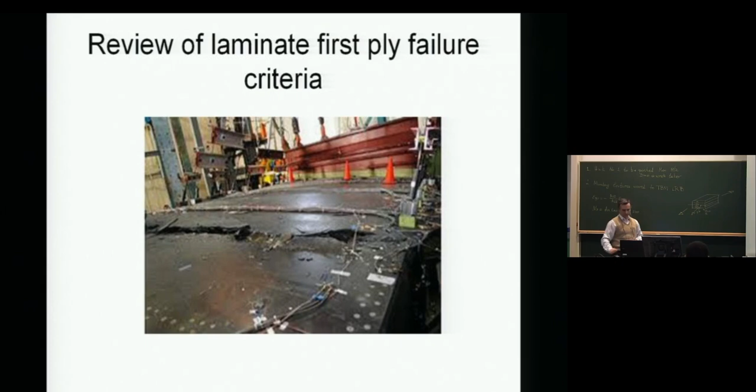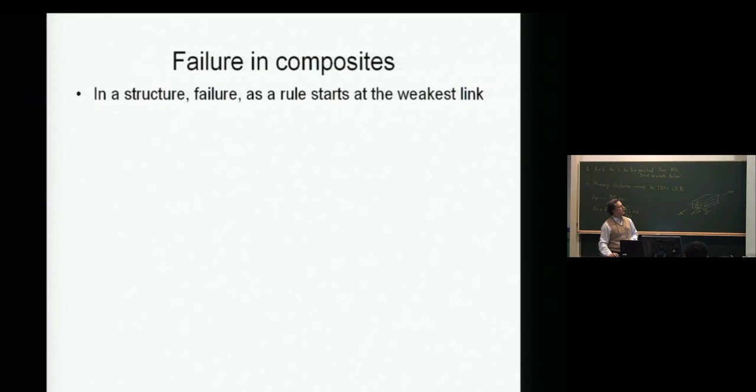Failure, as a rule, starts at the weakest link. It sort of makes sense, but if you compare it with what happens with stiffness, then it's actually quite insightful to think about it. If you're trying to calculate stiffness where you use a multiple set of materials, you will calculate the corresponding stiffness of each material and end up with the total stiffness as a weighted average of all the stiffnesses. For example, we said that for the A matrix,

Aij is summation of Qij times the Zk minus Zk minus 1 term, which means for a certain stiffness in a certain direction, let's say the 1, 1 direction, you take the stiffness of each ply in that direction and multiply by this; this now becomes a weighting factor.

It so happens if all the plies have the same thickness, this term would be exactly the same, but not all the plies will have the same thickness in a general design if you use different materials. So there's a weighting factor, and this then makes it some kind of a weighted expression. So in stiffness, everything contributes and somehow will be put together. In strength, the weakest link is what starts everything, and it has nothing to do with how strong you are in other locations.

And the weakest link in general, if you think in terms of the constituents, which are the fiber and the matrix, is the matrix itself, unless you are using metal matrices, which are extremely expensive and not commonly used. But let's say we are dealing with composite materials where the matrix is typical resin of today, which would be extremely weak compared to the fiber. So that's what will fail first.

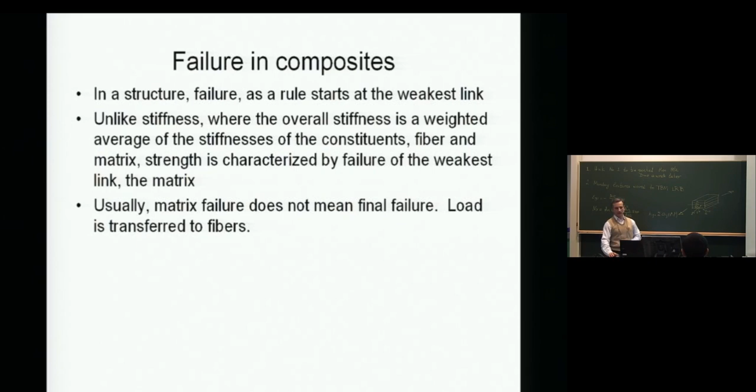And as you can imagine, if it's not a very strange stacking sequence, then that failure does not mean that all the fibers around that failure will fail. So load gets transferred from the matrix that broke to adjacent fibers through matrix that's still intact, or even through the broken matrix, and you can still carry load. And in fact, you can move load away from the plies whose matrix has failed to other plies and then behave as if you had absolutely no knowledge of that local failure.

Going back to the picture we saw before, these are zero plies, so the fibers are running from left to right in the middle, and these are minus 45 plies, and the little dots, essentially those white speckled spots, are just the fibers coming towards us at an angle of 45 degrees. So this is a crack at the top left here into the matrix, which basically occurs in between fibers. Similarly, this is a crack here.

Now, that happens very early. If you imagine a tensile load being applied, it happens very early because the matrix is weak. And even if I break this here, all that means is somehow I take the load that was in this bottom right portion, transfer it through the very stiff fibers here, and bring it back into the structure or the ply behind this crack. And you can do the same thing here, except in cases where you have delaminations, which means you cannot take load from here to here now because they have separated.

So the mechanisms are there, and I'm trying to indicate that there's multiple mechanisms, and what happens first is not necessarily related even to what happens last. Or if it does, it's a fairly complex process going from one failure mode to the next.

When the fibers break, of course, it's much more interesting, and you can see here that we have a whole bunch; the thickness of the laminate is in this direction, up or down, and all the plies have completely failed, and there's also some delaminations. So that's the ultimate goal, predict what's on the right, but we will start with trying to predict what's on the left, and we'll sort of stop there because we will simply raise our hands up and admit complete defeat.

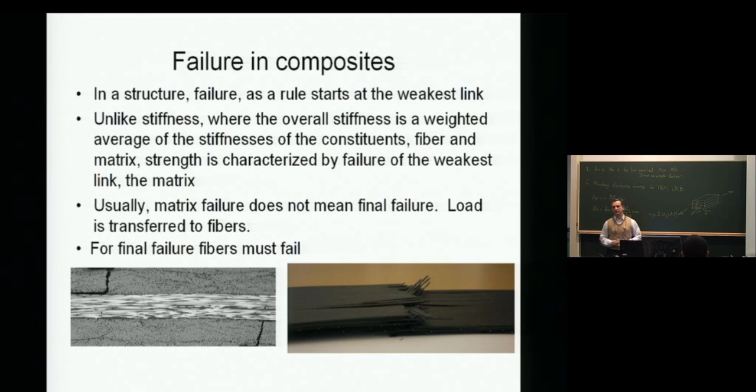So let's get into the failure modes of a ply in 15 minutes. That way we'll maintain the momentum.

This is close enough to 15 minutes, minus half a minute.

One correction: when I was writing the inverse of the A matrix, I had the A22 here and A22 there. This A22 is correct. This one was wrong. It should say A11. That's an oversight, thanks to the gentleman that pointed that out.

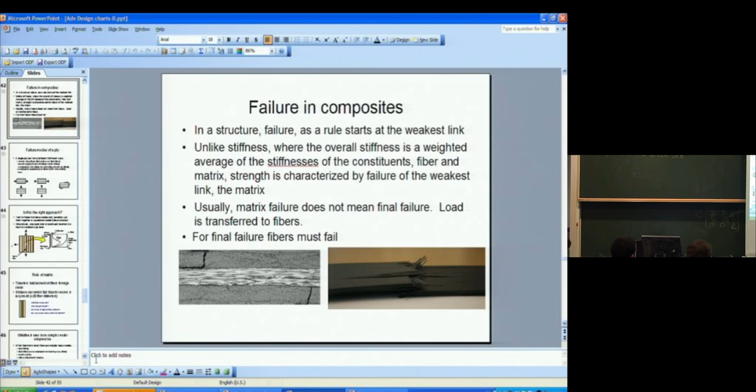Now, before we continue, we'll actually play, as I was saying, composites detectives. Imagine your job is being a composites detective. But it can be interesting. Where's my chart? There it is. So back in December, Airbus did the ultimate load test of their wing. And watch the picture. Can you give me any information? Even if I enlarge it, right?

So what do we see? We see, if we use our imagination, that there's a fuselage here. These are the cockpit windows, so it's coming at us. And this is actually the one wing and the other wing. And this is the so-called whiffle tree, which is the scaffolding that applies all the loads.

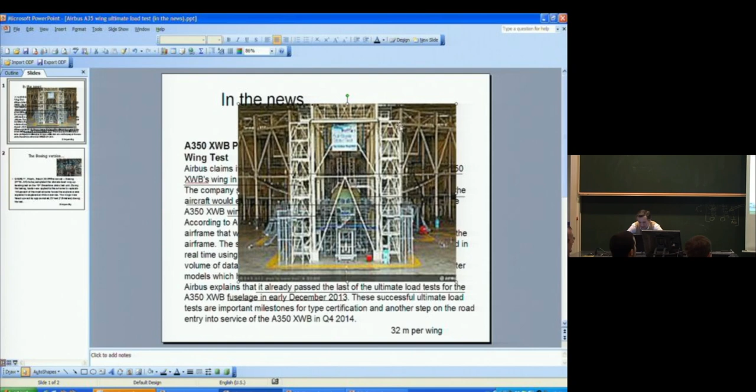And talk about not giving any information. It's a picture which could be like my son playing with his Meccano thing, and with the proper coloring, it could easily have been that. But the fact remains that they actually did it.

And let's read a little bit because it's interesting. Successfully performed the ultimate load test. The company states it has applied loads up to 1.5 times higher than those the aircraft would ever encounter in its entire in-service life. This is public relations at its best. Everybody knows this is the ultimate load. It's a requirement. You don't just do it because you are conservative. You are told by law you have to apply 1.5.

But if you write it this way, it's a wonderful way of bringing in a sense of security, because people say, okay, they actually multiply by 1.5. Now, they forget that if you get in an elevator, the safety factors there are 8. They actually multiply by 8, but the weight is not an issue. And there are some people that are afraid of getting into elevators. If you told them it's a safety factor of 8 and you're still afraid, what would you do if the safety factor is 1.5? I think that will increase the number of people that are afraid of getting in airplanes by a lot, including my wife. I haven't told her that.

Wingtip deflection exceeds 5 meters. Okay, that sounds phenomenal, but if I tell you now it's 32 meters per wing, so it's 64 approximately total. Where's my chalk? Basically 5 divided by 32 is the tangent of the angle, right? So if this is my wing and it's cantilevered here, yes, I know it actually bends, so let's draw it bending so the purists among you don't complain. So the wing does this, and this is 5 meters, and this is 32.

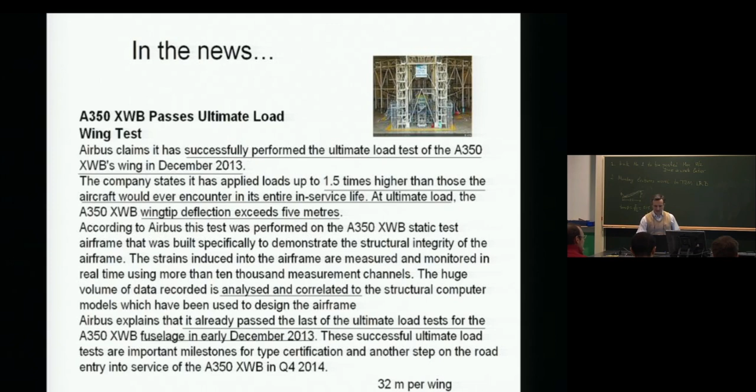Company states it has applied loads up to 1.5 times higher than those the aircraft would ever encounter in its entire service life. Now let's see how the 787 announcement was when they first came out with the same story. First of all, look at the picture. Do you see any similarities? It's a completely different company, each at the other's throats. They would kill for a useful picture, but they both know how to give you a useless picture. Here's the exact same thing. The 787 cockpit, the wing, bending like crazy, and all the scaffolding so you cannot see anything.

And I mean, I don't blame them. I would probably do the same thing, but it just makes it harder for us to try to deduce a few things. So now remember what we were reading. This was back in March 28th of a couple of years ago. Today completed the ultimate load wing upbending test. At least here they give us a little more information. It's upbending. I mean, you can tell by looking at it, but at least they say it. On the 787 Dreamliner, during the testing, loads were applied to the airframe to replicate 150% of the most extreme forces the airplane is ever expected to experience while in service.

Makes you suspect that the PR person, the public relations person, is the same. They just changed companies, and they said, this is what we'll give to those guys. It's the exact same framework. Give them a feeling of this being a very good piece of work, which it is, a very safe piece of work, which it is. But don't tell them, okay, this is legal, by law they have to satisfy this. It's just because it sounds so good to know that there's a safety factor of 1.5.

The wings were flexed upward by approximately 7.6 meters. Now this is interesting because the wing is shorter. Remember, the 787 is slightly smaller. So I would have 7 divided by 30, which would make the angle bigger. And you can sort of tell by looking at the picture now that this is really bending up. And of course, this may not be at ultimate load, may be more than ultimate load. They never tell us. But the point is the angle would be bigger, so I would expect the 787 to be more flexible. So the EI that one would back calculate would be smaller.

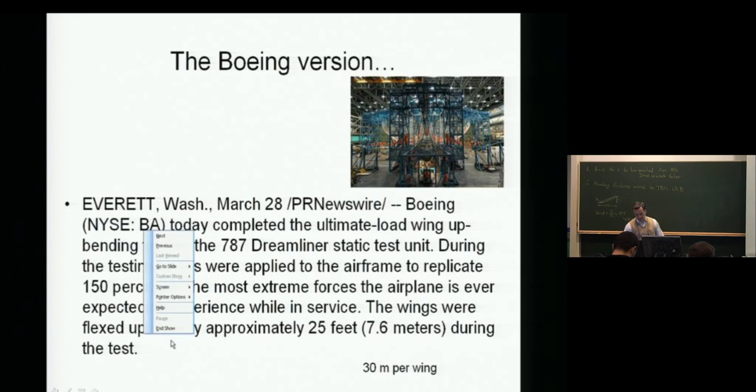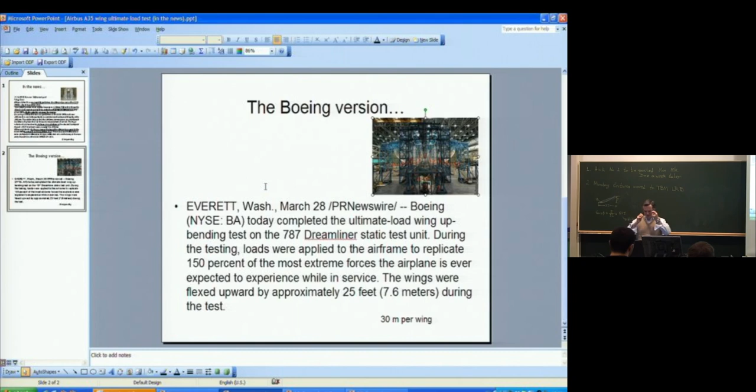And that would make some interesting thinking in terms of, okay, flexible wings have certain aerodynamic properties that are desirable, but also their dynamic properties might not be. So it would be interesting to carry this further, and every once in a while we'll be doing some of this, not necessarily on the same topic, because it can take 3 months, and then we would be off by a factor of 2 in the end if we don't have all the information. But that is where we are. As of December, the A350 has passed the full-scale tests, and if I can find my correct file. Yes.